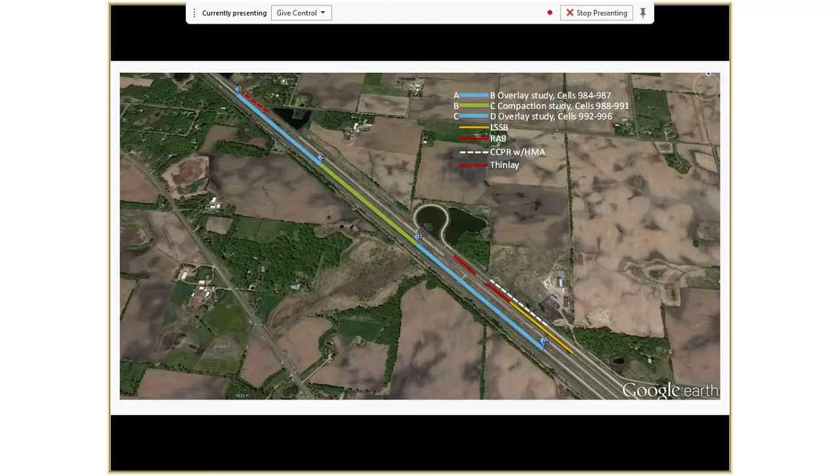Next, so the objectives of the large size subbase were basically to test a soil stabilization technique, primarily used by Wisconsin and Illinois, as a way of traversing soft soil conditions that aren't necessarily excavatable - not soils like organic soils where you definitely want to get them out. It works by virtue of the load-bearing capacity of large material. We're talking 8-inch, 5-inch minus material from a primary crusher and quarry, placed over soft earth that otherwise you normally wouldn't be able to get construction traffic on, or can't dry out. So that was the gist of this experiment, comparing two different thicknesses of that large size subbase, both a 9-inch and an 18-inch section.

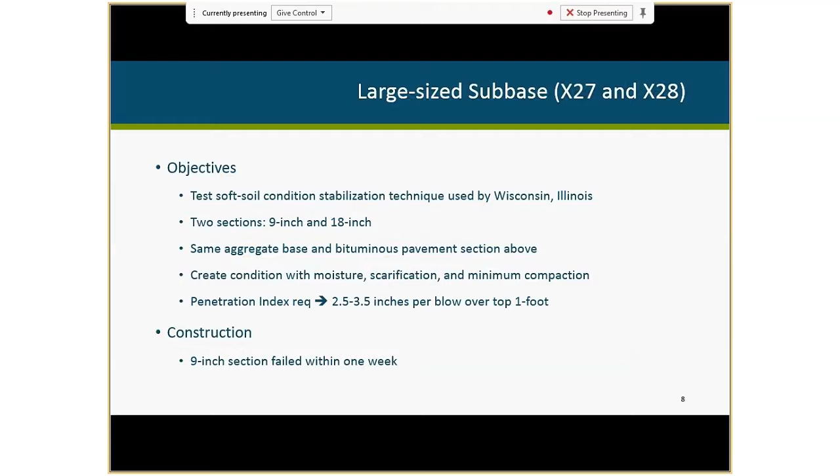This shows the design details for each of the four sections that were originally envisioned. Sections 127 and 227 are the two 18-inch large size subbase sections. All four have 3.5 inches of hot mix asphalt, a typical level 3 mix used on low volume roads with a 58 minus 34 binder, representative of what we'd use on a reconstruction project.

Sections 128 and 228 were the 9-inch sections with the same thickness of aggregate base and hot mix asphalt on top. You'll notice a note on the right that says 8-inch PVC. We put that in because of existing moisture problems throughout this area over many years. These sections' basic footprint has been in place since the early 1990s through several iterations of test sections, many plagued by moisture conditions. We wanted to blow out that intermediate ditch and get positive drainage, which is why we put that in.

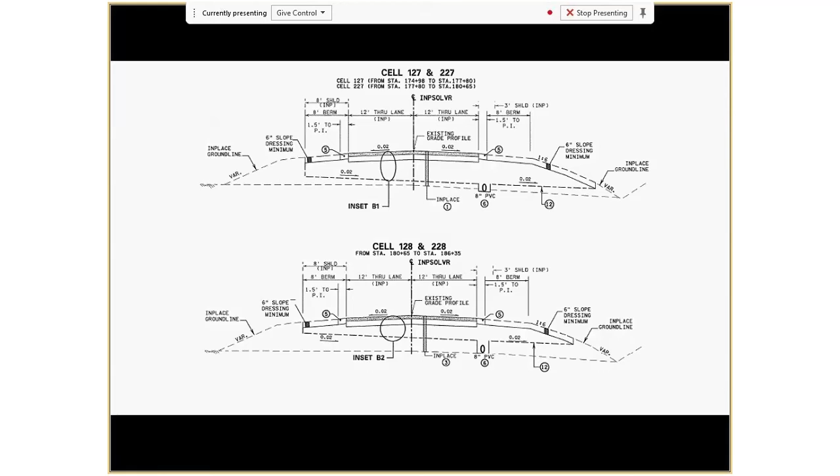The big effort in constructing cells 27 and 28, the large stone subbase, was to create this weakened subgrade condition. I don't have slides showing the subgrade when we removed the pavement, but it was very compact, very stiff, and well below optimal moisture. We had to work quite a bit to get it to a condition that met the Geotech team's requirements.

It was a performance requirement to add water and rip the soil, allowing it to marinate to get down to a penetration index between 2.5 and 3.5 inches per blow over the top foot. You can see the dozer in the background with teeth tearing up the grade, and off to the left a water jet normally used for liquid mulch and grass seed, but we filled it with water and sprayed it over the roadbed. You can also see on the right the long white tube, the 8-inch PVC drain.

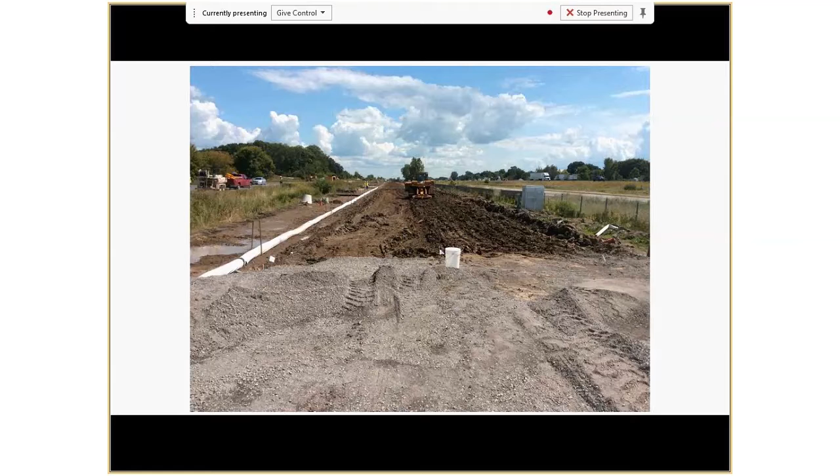Now you could ask yourself, why do we need an 8-inch PVC drain? During construction, this became known as Van Dusen's folly. I don't know, it looked bigger in real life than it did on paper. Just saying.

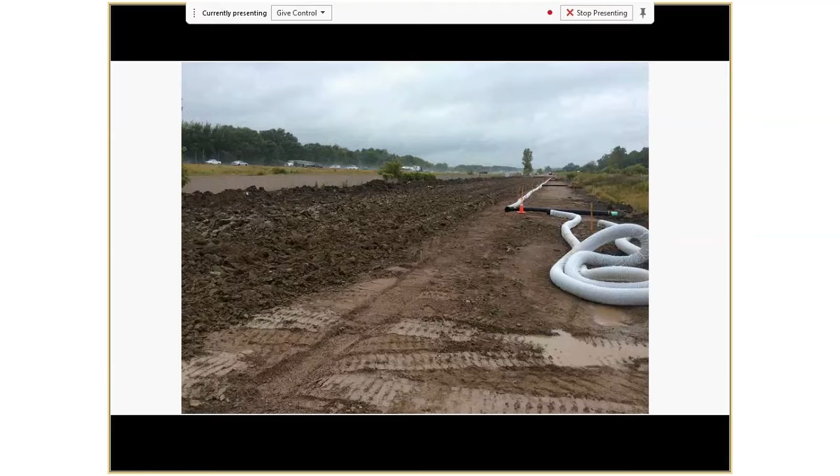This is just another shot. We had good cooperation from the weather with some rainy days, which allowed it to soak up moisture after it had been ripped.

This is the video, if we can play this. I hope it works. But this is Mike Vertis, and if he did one thing well that summer, and he didn't, this would be it. So is it working? Of course it's not going to work.

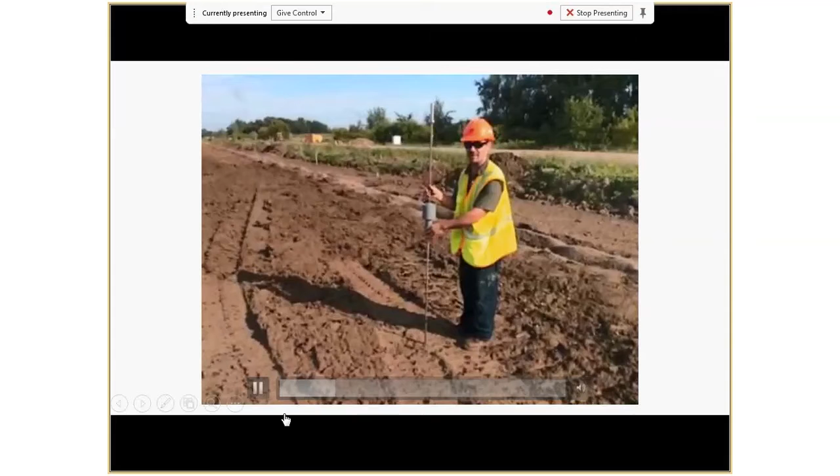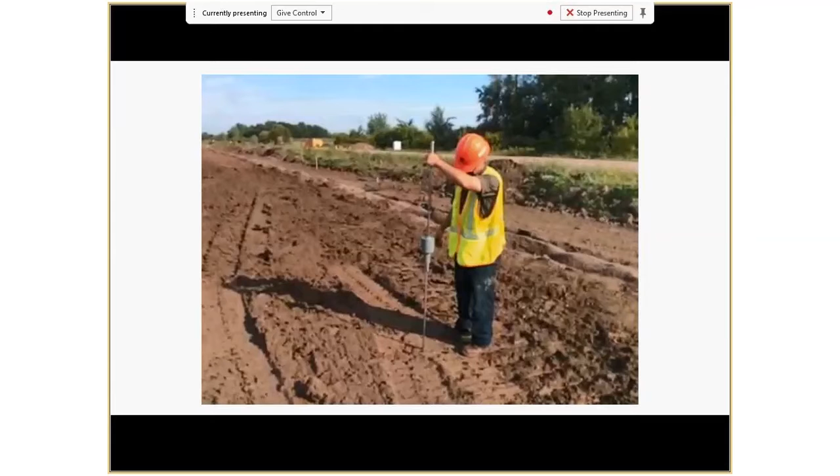Over the top foot, the target was 2.5 to 3.5 inches per blow. You can see a piece of electrical tape on the shaft. That's actually a little too soft, about 4 inches per blow, but when you're wading up to your ankles in goo, you tend not to get too persnickety about things. I hope everyone's okay with that.

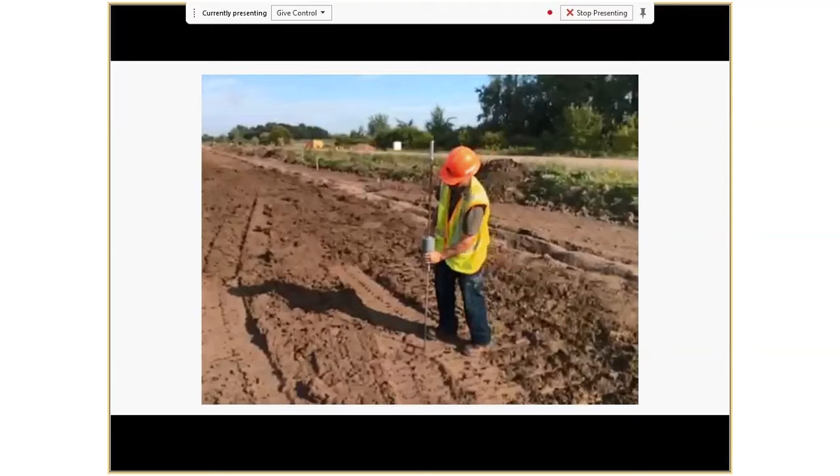We tested many different points, some that looked too weak, some too stiff, and we had the contractor. They were very willing to work with us in preparing it so that we achieved, by and large, the conditions that were being sought.

We started on the east end, this is the 9-inch section. You can see a little layer of the large stone subbase. One comment about this: while it did meet the spec, the spec was written in such a way that this was kind of a borderline meeting, on the fine side of the specification.

We decided that it would meet the objectives of the experiment and proceeded with it. But even when we first started pushing it out from the existing pavement on that far east end, we started noticing some issues with pumping of the subgrade soil. The subgrade soil here is what we call a clay loam. In AASHTO, it's an A6, unified it's a CL - a lean clay.

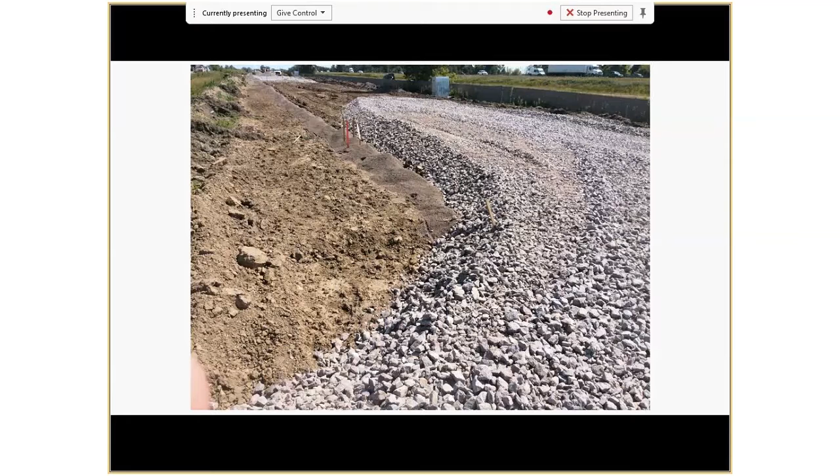Regardless, we kept going from that easterly direction towards the west, pushing it out gradually with dozers. We started noticing problems with all the repetitions of load trucks coming out - it really started getting a little rough looking. So we started approaching from just a little ways down when we had a crossover, which you can see in the foreground there.

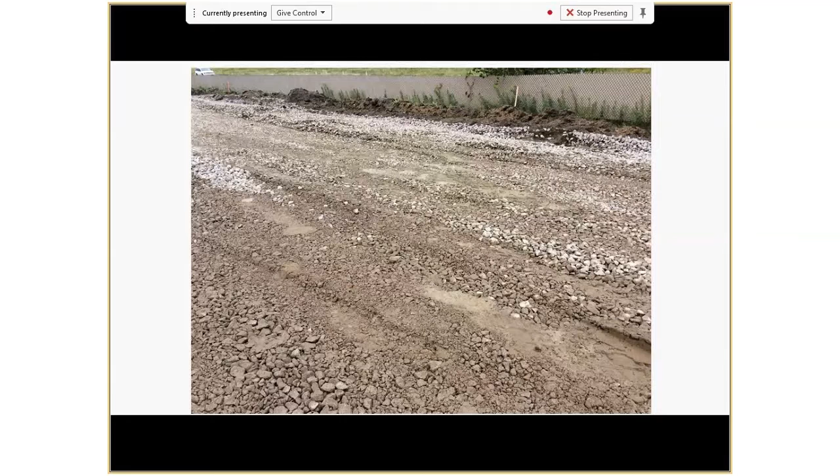And after it was all completed, with all the trucks running on it, this is what we ended up with. You can see puddles of goo oozing up through the voids from the subgrade soil underneath. If you were out there, you would have said, this is it, we're going to stop now and regroup. But that's not what I did.

This shows just another view. You can see in the foreground here the wet puddles and the kind of contamination coming up from underneath. And then just towards the top of the slide, you can see a fairly solid line where you don't see the puddles. That's the break line between cell 27 and 28, where it switched from 9 inches to 18 inches.

One other thing - for cell 28, the plan was to put this 18-inch total layer down in 2 lifts, 9 and 9. But we opted instead of having 2 subsections there, we've got one 18-inch section. Because of the problems we observed with the 9-inch, we felt that doing a 9 and 9 probably wasn't going to be beneficial for the project.

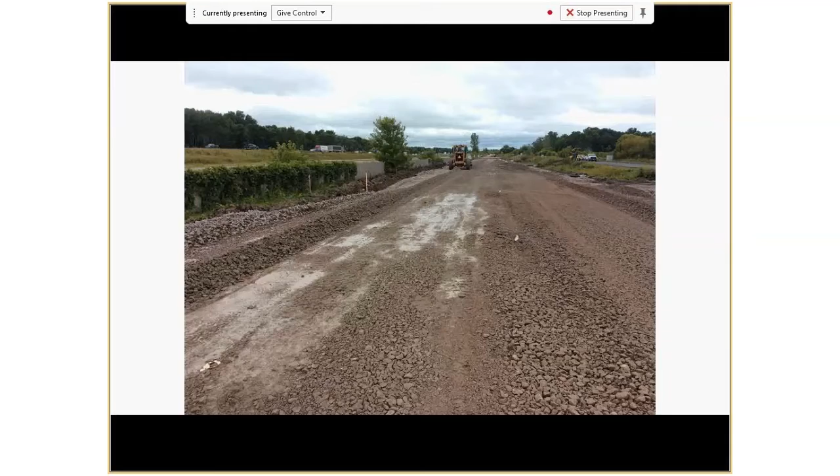It was actually softer on that far west end. So I won't say what we did, but we actually paved the first lift of asphalt on that really weak layer. That was a mistake. Within a couple days, we decided that we were going to tear that out, and we redesigned the sections with John's help and the Geotech committee.

This just shows that at the bottom of that large stone subbase, about 9 inches down, there was still some of the rock material embedded into the clays and subgrades. So it actually did penetrate down underneath and become intermingled with the subgrade soil.

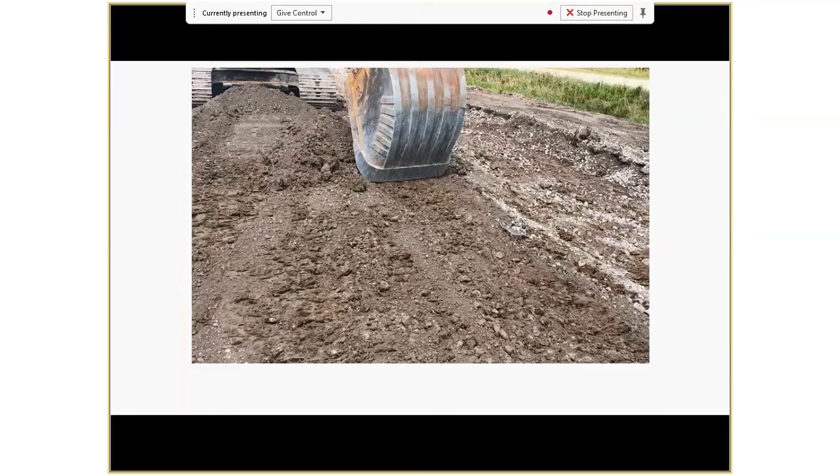These are the redesigned sections. John worked with Tensar and graciously donated some biaxial grid and a triaxial grid. The part circled in red is the original cell 728 - we had to renumber them because of our numbering system and the database. That was left in place because at that location we had a very high voltage power line buried there, so we didn't want to disturb that anymore. We left it in place, and we ended up with the gap there.

We ended up creating 4 new subsections, so we've got 4 different combinations: reinforcing grid all by itself, and then a reinforcing grid with the separator fabric, and 2 different types of grid - a biaxial and a triaxial.

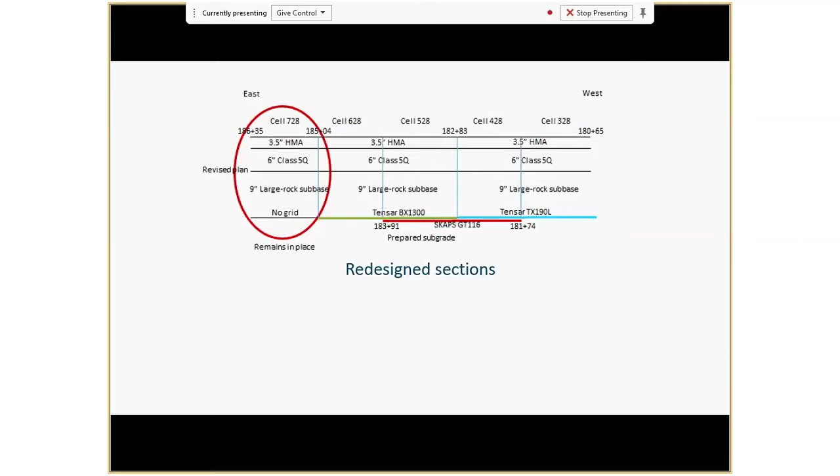This just shows placing the large stone subbase over one of those combinations, the biaxial grid and separation fabric. And it was like a difference between night and day, as you can probably imagine - there's no intermingling or pumping of the subgrade soil underneath.

One thing I should have mentioned - after we removed the first sections, we did do the scarification and moisture conditioning again, so we got it all gooey for this iteration.

This is a life-threatening close-up. I did have a hard hat on.

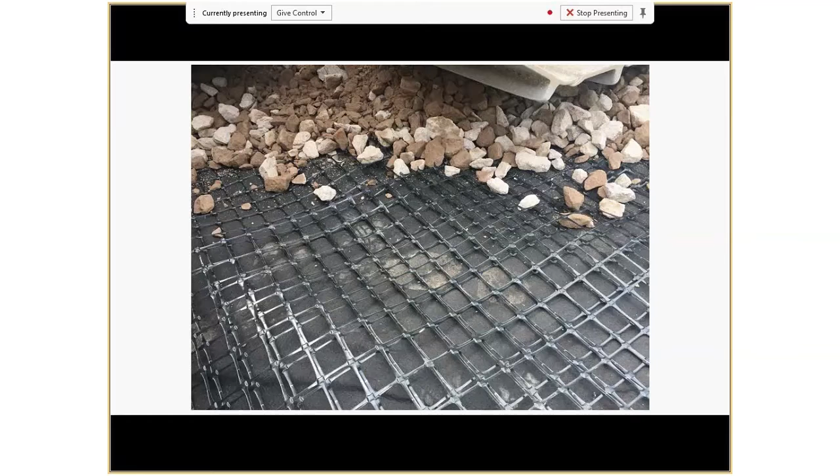Recycled aggregate base, so that's it on the large stone. All throughout these, when we got to various hold points within the construction, we were out there doing moisture testing, nuclear density testing, FWD testing. I'm going to forget a lot of it because it was over almost a year ago - DCP, air permeameter, etc.

These data, plus all the performance data that we've been collecting since we've been trafficking this section, will be provided to Soheil Nazarian and Boris Eaton for their research projects. The recycled aggregate base sections basically were conceived to study the relative performance of different types of recycled material.

We looked at 100% crushed concrete, one a coarse 1.5 inch minus gradation, and another with our standard gradation of 1 inch minus. We also looked at a crushed limestone aggregate base, and a blend of crushed concrete and recycled asphalt pavement.

The goal is to compare the performance of these similar sections. One thing to point out is there's a gap in these sections - the westerly 2 sections have a sand subgrade, while the easterly 2 sections on the other side of the area we left in place are on clay loam subgrade. We deliberated over that in the committee meetings - that was the real estate we had to deal with, so that's something to take into consideration when looking at performance data.

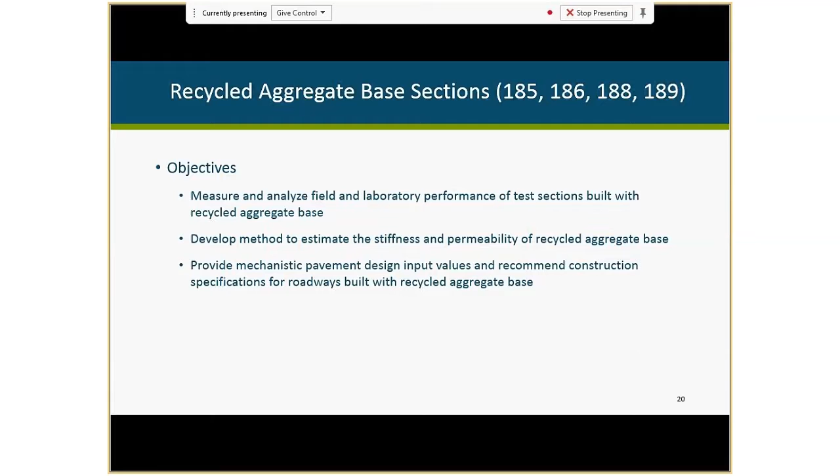This is meant to provide support materials and performance data for mechanistic empirical design, and at the very least to compare the performance of 100% concrete in 2 different gradations against more conventional recycled aggregate gradations.

All the bases were placed in one 12-inch lift, with 3.5 inches of Superpave Level 3 using a -34 binder. The subgrades on 185 and 186 are more of a granular subgrade, while 188 and 189 have the plastic clay loam subgrade. We also had subgrade subdrain installed towards the median ditch in these sections.

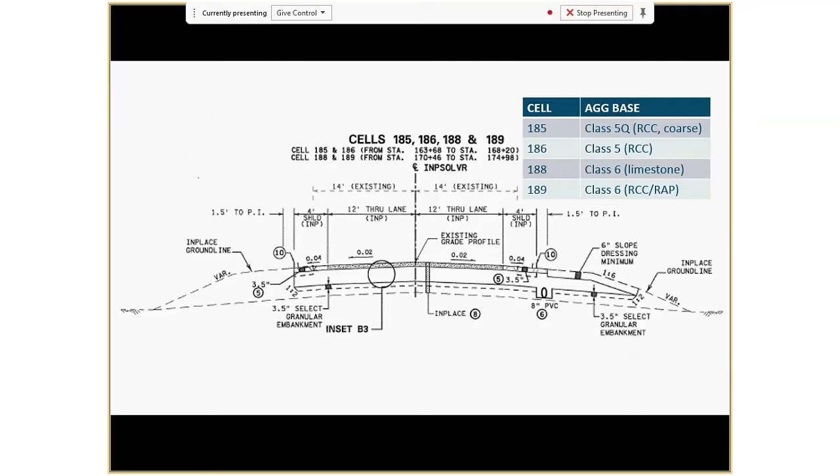For these sections, we didn't try to create a weakened subgrade condition like we did in the large stone subbase. This is more conventional construction where we specified density, trying to achieve normal quality compaction on the subgrade. Cell 189 is the concrete/RAP blend.

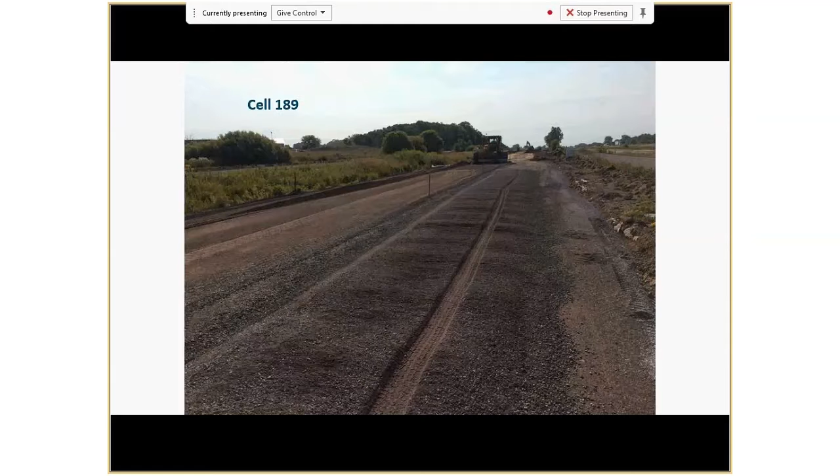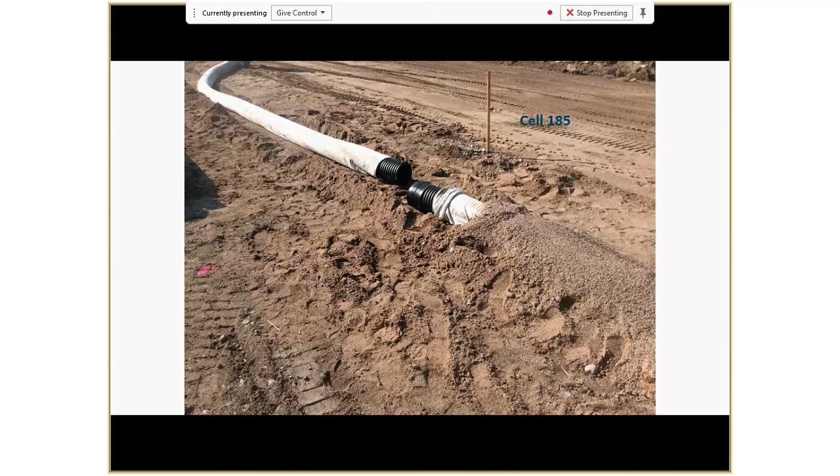As Brett Troutman mentioned, we installed lots of sensors in many of these sections. This shows the sections where University of Texas El Paso was partnering with us - they were working on the recycled aggregate bases, and we'll hear more details about that, but we helped them install their sensors, geophones, and pressure cells. In addition, we installed temperature trees, thermocouples, pressure cells, strain gauges, moisture cells, etc.

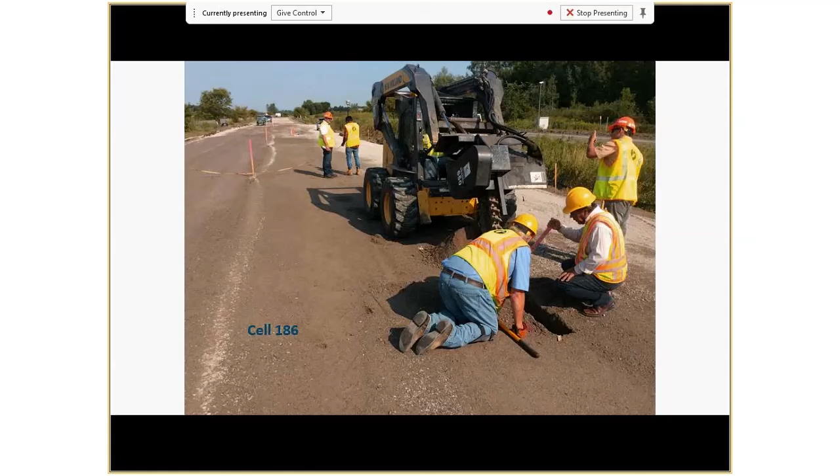This just shows one of the devices we used in our geotech point testing - the air permeameter test being done.

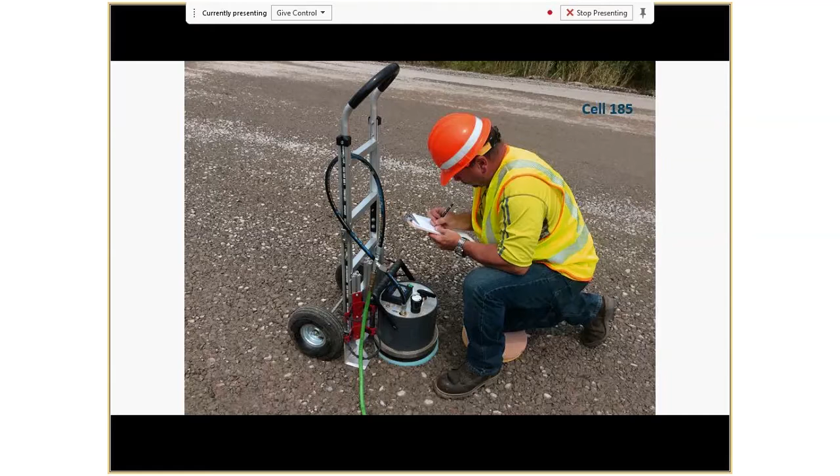University of Texas El Paso brought up an intelligent instrumented roller - I think it came from Texas, I don't know exactly where - to use to test their geophones that were embedded in the base and subgrade.

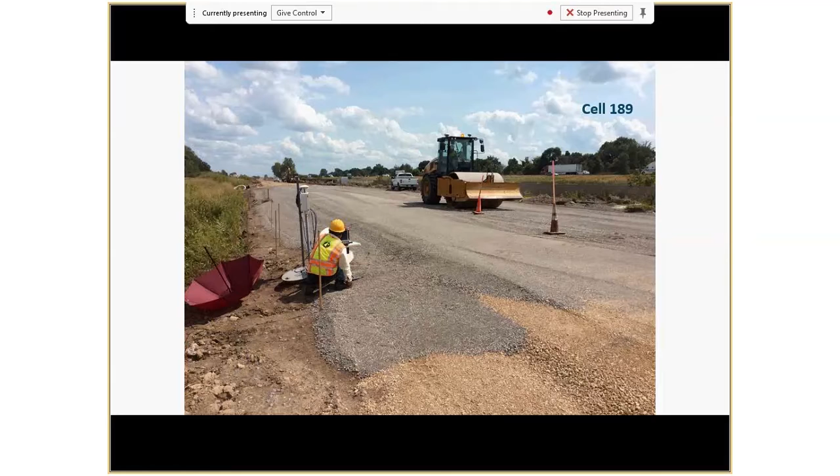To wrap it up, I wanted to acknowledge all the state sponsors, associate members from industry and academia, and consultants. We had a lot of help from the Golden Valley resident office - they administered the contract, really good people to work with, and District 3 always provides great assistance from surveys, maintenance, and materials. Our prime was McCrossin, and then also Tensar.

And that's that. I don't know, John, you want to add anything? We're just interested in having maybe questions asked. It's going to be great.

One clarification - as Dave mentioned, the report being produced is actually by the team of Iowa State University and the University of Wisconsin at Madison, doing the long-term research as co-PIs. Dr. Nazarian and UTEP are a partner on this HRP project and are producing a report. Dave White with Ingios has a report on the construction testing done last summer with both the intelligent compaction roller and his automated plate load test. That report has already been posted on the team website.

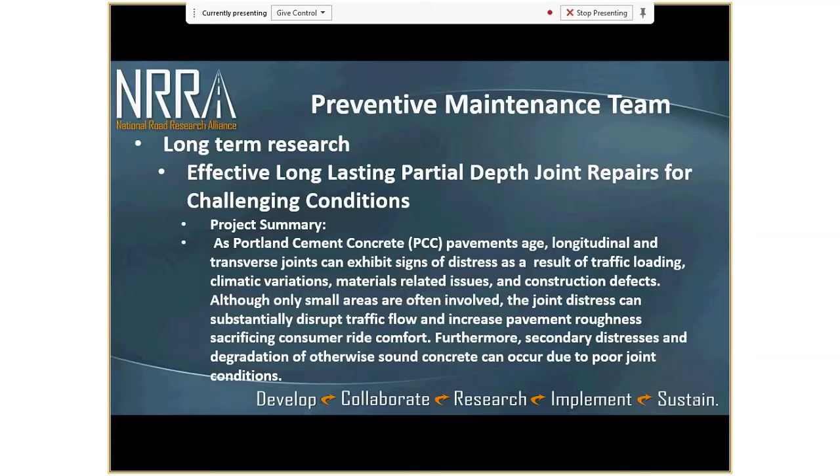A couple of the tasks started on this project - we've got a good summary. Dave Van Duzen did a terrific summary in that construction report that's been mentioned a couple times, so all the different seal materials and spall materials listed are all in there. We're working on a survey and literature review, and as part of this project we'll also have an annual summary of the condition.

Short-term synthesis work that we're working on is coming up fairly soon. We have one consultant, SRF, also doing our short-term synthesis project. You mentioned each of the four teams had two top priorities. We're going through all those - the longitudinal construction joint, hot mix, and tack coats were the first two that started and are wrapping up, and as each one gets done we'll get into the next one for the rest of the teams.

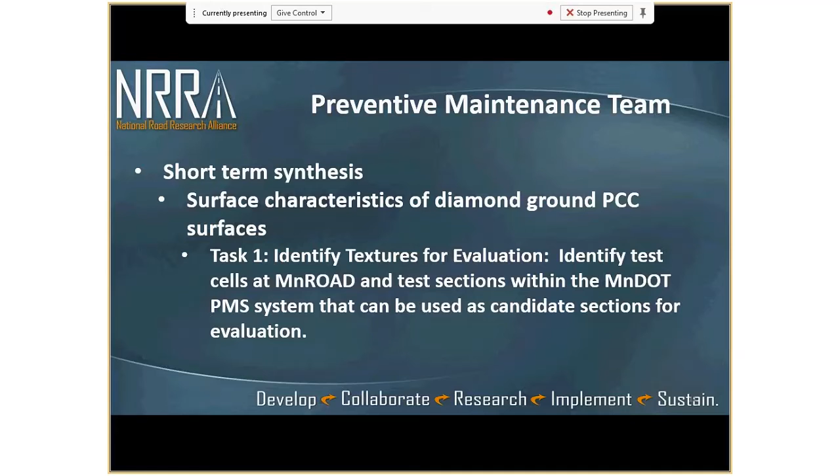Surface characteristics of diamond ground concrete surfaces was listed as the first group from the preventive maintenance team - what's out there, what's available, what can we be doing. I work mainly in the hot mix area, but I know our concrete guys are doing a tremendous job, and the next generation concrete surface, the new diamond grinding pattern, is one of the quietest ones ever used out there. After we do these CPR repairs and the grinding's done, it's as quiet as I think you can get a pavement, so a tremendous amount of work and innovation is going on with the concrete group. This synthesis will touch on all these areas, the different grinding and surfaces available, and maybe even some results from the dBA measurements.

The second project is pavement preservation approaches for lightly surfaced roads. We had some locals with our group, so we're really looking at - when we say lightly surfaced, it's probably not hot mix asphalt and it's not gravel. It's somewhere in between. Is it the double chip seal? Is it oil seal type things, or if we want to do even a CIR and put a light surface on there - what type of options are available, the volumes, ADT, design information. So that'll be the other synthesis.

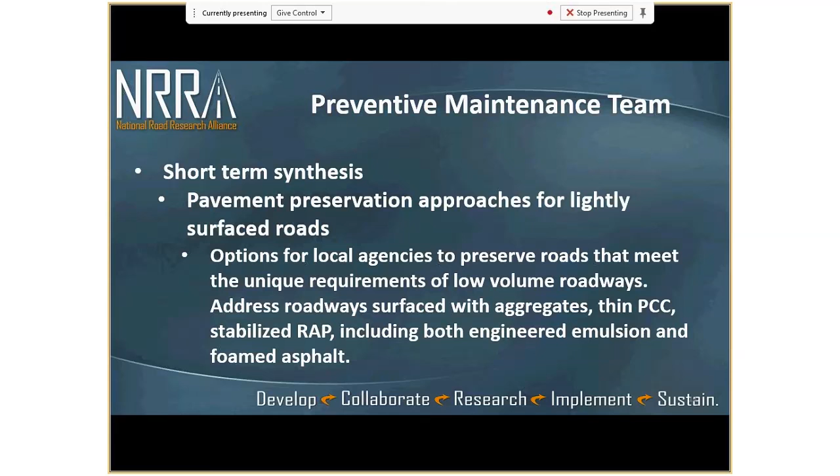Actually this one is probably the least scoped - we haven't dug into this one too deep yet. So our team will scope this out a little, and we'll decide the way we'd like our consultant to move forward as we discuss approaches for maintaining lightly surfaced roads. I think this ties in a little with maintaining low volume pavements - we've got a lot of lane miles out there, and we'd like to keep them as smooth as possible, at the lowest dollars per lane mile per year, the most cost effective.

I think we're getting close to the end, so that was a quick summary. We've got plenty of time before lunch. If there's any questions, I'd be happy to answer them. Comments? Okay, that's great. Thanks.